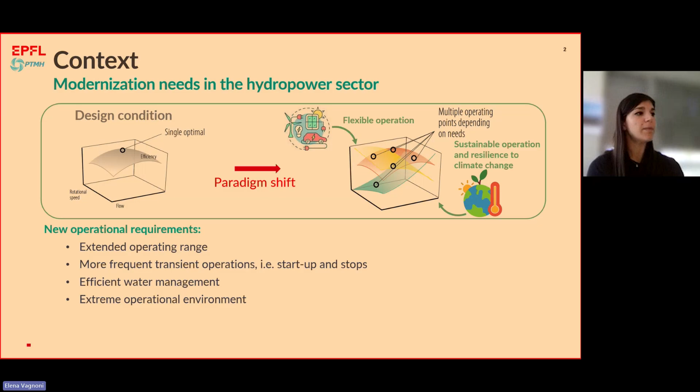These ask for new operational requirements, namely extended operating range, more frequent transient operations. So we hear more and more those high numbers of startups and stops per day, efficient water management, as well as, as I already said, extreme operational environments.

All those new requirements, of course, do not come without issues in terms of operation and maintenance of hydraulic machinery particularly. So we are experiencing premature aging as well as safe operation issues due to increased vibrations and fluctuations of pressure. That leads, of course, to increasing OPEX costs, failure, as well as slow response of machines, and also environmental concern.

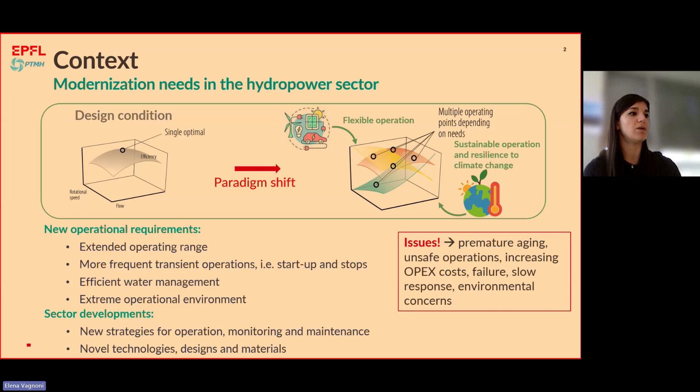With a focus on the premature aging and especially risk of premature failure of mechanical components, the sector is today developing new strategies for understanding how to better steer operation, potentially in an optimal way, how to develop new monitoring strategies, as well as whether we can move towards a predictive maintenance approach. And that, of course, also calls for novel technologies as well as design and materials.

When it comes to premature aging and failure, one of the main topics is what do we actually know about fatigue-induced damage in hydraulic machinery? So what's fatigue? Fatigue is the deterioration of material properties, structural properties due to damage because of fluctuating stresses.

In turbines, we often have such a condition because we often have off-design operation that leads to fluctuations coming from the hydraulic loading, and also transient operations such as startup and stop that, of course, impact and increase the unsteady loading, as in transient operation we have to pass through unsteady operation of machines and flow.

We have cracks in hydraulic runners. Even the best welding conditions and best manufacturing properties still leave micro cracks in the structure because of manufacturing, welding and material defects. And overall, we also have quite heavy hydraulic loading that is translated into structural loading. And this long-term operation under high loading, of course, also leads to micro crack formation. The issue is that those cracks propagate under cyclic and unsteady loading, and that can lead to failure.

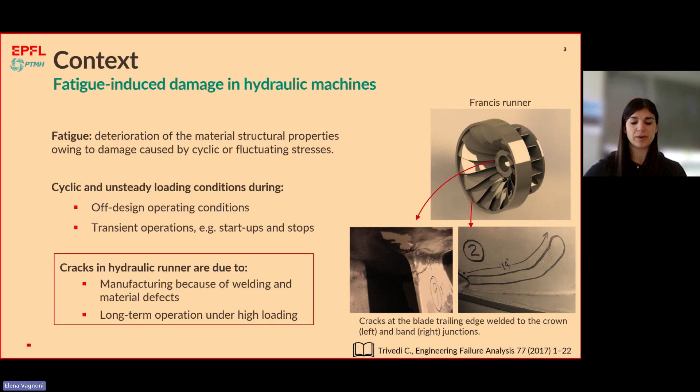What do we know about the forecast and modeling of fatigue? Do we know today how to properly forecast and track how cracks propagate? To answer this question, we mainly have to understand the dynamics and analysis that lead to such a forecast. In particular, how a crack propagates and how to forecast the deformation of a runner itself during operation. We need first to know, in terms of structural analysis, what are the loading conditions of the machine.

So what are the hydraulic loadings through the different operating conditions, not only steady state, but also during those transients that lead to stresses. And we want to know what are those maximum stresses, and are those compatible with the structural properties of the runner. But we also need to know the modal analysis response. So what are the modes and natural frequencies, which are also related to damping, added mass and mode shapes. So what is the fluid-structure interaction actually behind the deformation of the runner?

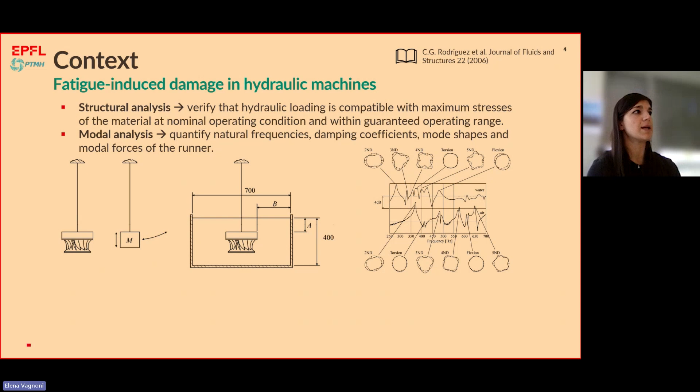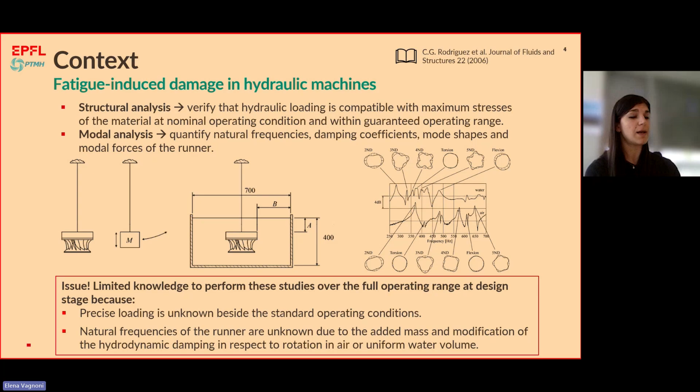There are some approaches today that lead to an analytical understanding of both the modal response as well as the structural loading of runners. But the issue is that this knowledge today is limited to selected studies, and there is a lack in understanding how both structural loading and natural response behave through the operating range, particularly during transient conditions. It is to fill these gaps that we are currently addressing quite an important research effort to try to understand those problematics and give a scientific answer to such research questions.

How do we do that? We leverage our experimental capabilities. So here you have one of our test rigs where we do reduced scale model testing that you can see here. Let me put the laser, it will be easier.

Here, that's the model test that we want to study, and in particular, as you will see later, we perform measurements directly on the runner during transient conditions to measure the stress and of course also the hydraulic properties of the flow. The flow comes from here. We have all the energy of the flow, which is given by the feeding pumps that allow us to drive the flow both in turbine and pumping mode.

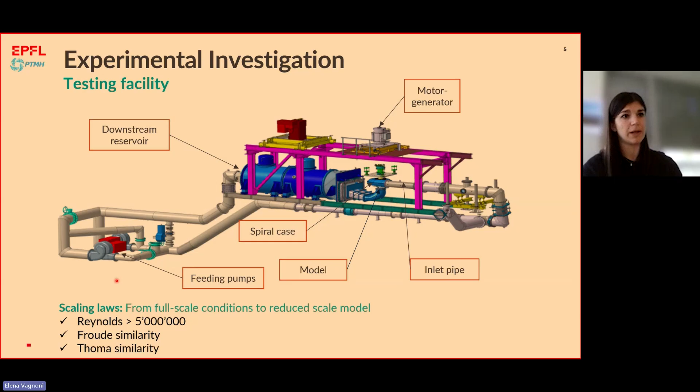We try to keep similarity laws as close as possible to IEC standards, also for transient conditions, so to respect Reynolds above 5 million, Froude similarity, as well as Thoma similarity when we assess the cavitation performance. This is our telemetry system and the equipment that we use to perform such a study.

The telemetry system allows us to do onboard measurements of strain through strain gauges on the blades. Here, for instance, you have an example of one of the equipment that we used, and also pressure measurements on the runner. The telemetry system is the same, and different sensors can be exploited. Of course, we still want to track what happens to the stationary part of the machine.

We have several sensors in the static part of the machine, at the guide vane surfaces, in the vaneless gap, and in the draft tube. It's not represented here, but we also have some in the upstream pipes to study any upstream wave that could affect the pressure fluctuations.

The selection of where we put the strain gauges is not only to measure the stress itself, but also to understand the stress gradient and the proportion between tensile and bending stresses. As we know, in pure crack propagation methods today only the tensile stress is accounted for, while with stress-life methods based on a Wöhler curve, typically both tensile and bending stresses are taken into account.

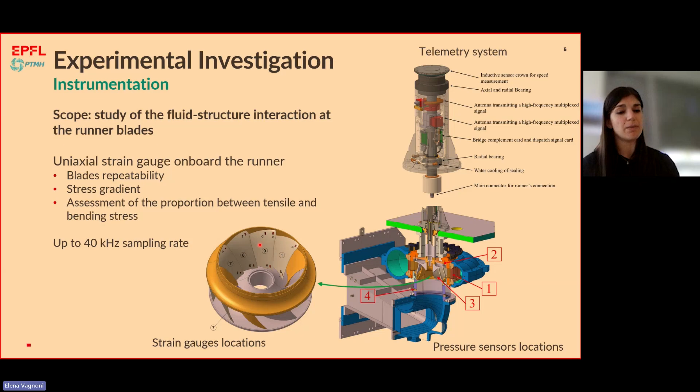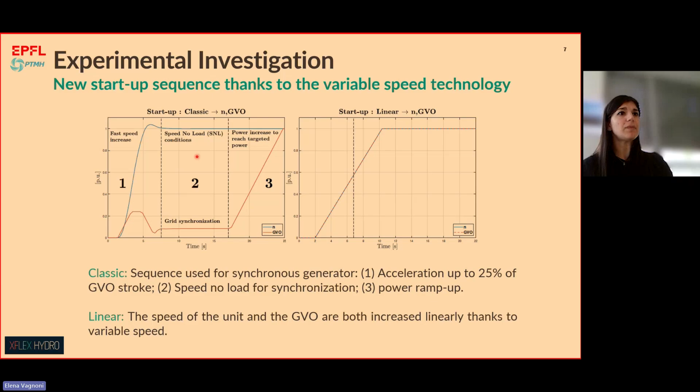We also tested what happens if we have a full-size frequency converter, so we are able to accelerate linearly without passing through speed no load. Some of you might have met Martin Seydoux while he was with me at EPFL a few years ago. This was one of the main results of his thesis studying the stresses and the damage.

One of the main conclusions was that if we are able to use a variable speed converter, we are able to decrease the fatigue, so to increase the lifetime of a machine, with up to 15 times fatigue-induced damage reduction in a single startup.

Here you have stress measurements over, in this case, 25 seconds equivalent in model scale. Of course, in the prototype that would be longer, or 8 seconds if we can use a fast full-size frequency converter. You might notice that here we have quite high amplitude stress fluctuations that we do not have in any other operation, even though the overall stress is lower for the linear startup.

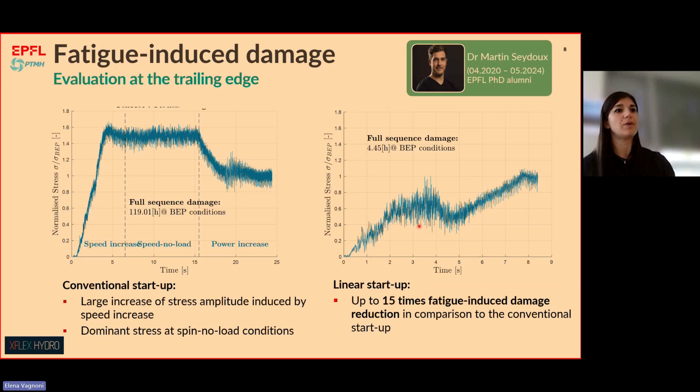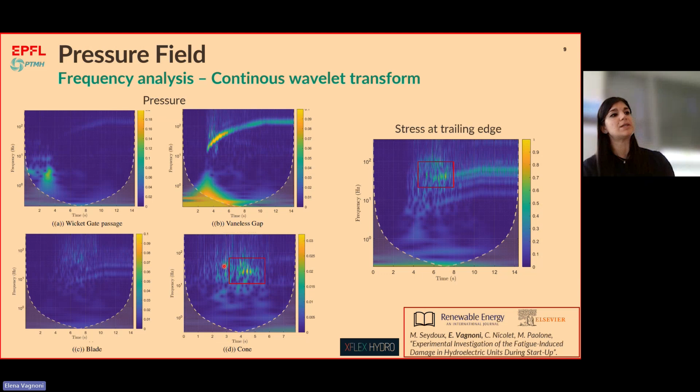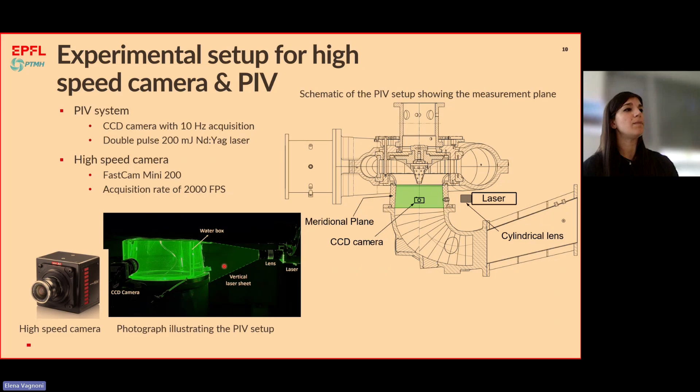We can also see that such stress amplitudes correlate with what happens in the cone, and we observed that this is linked to a vortex rope. So we wanted to know more. We performed both high-speed camera acquisition and particle image velocimetry with our equipment. And here I want to show you a video of what happens.

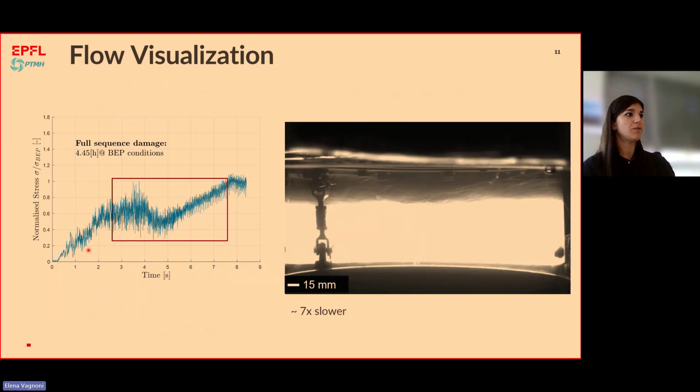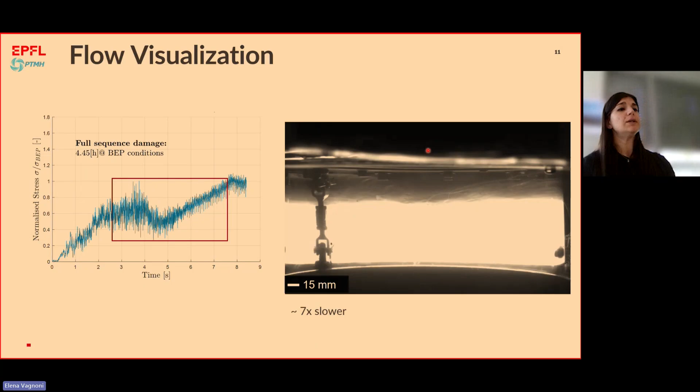What does the PIV say? With the PIV, we notice the beginning where we have no cavitation and the flow accelerates. Then we see the creation of these double vortices where only one vortex cavitates. Then we have double vortex cavitation, then a vortex collapse, a uniform flow, and then the axisymmetric vortex rope. So we notice that this fluctuation is related to when the double vortex cavitation happens, and when it collapses into a single vortex.

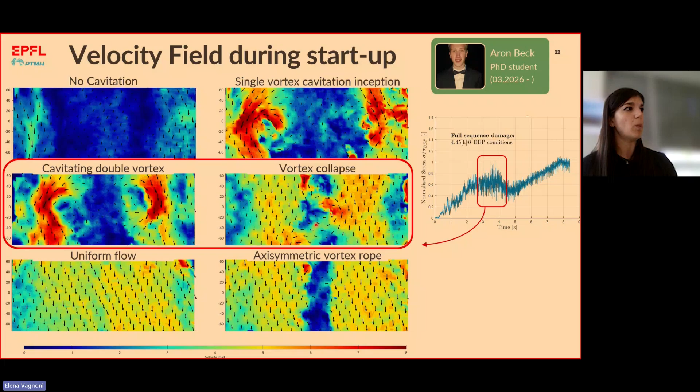We were quite limited with this PIV because it's not fully time resolved. In reality, this is a 10 Hertz classical PIV system. So we could not push forward with our measurements. So we thought, why don't we perform a CFD to see if we are able to capture such a dynamic?

So as a solver, we use coupled numerics. This is a software developed at the technical university in Lucerne. So it's a collaboration that we did with Ernesto Casartelli. Some of you know him from University of Lucerne. They developed such a software, and so in this collaboration we use it in order to predict the hydrodynamics of the flow during the startup.

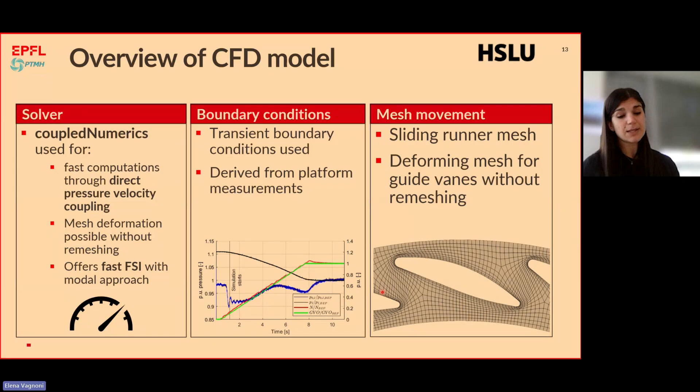It has the advantages of being a deformable mesh, so you don't need to have a remeshing during the transient, and offers also a fast fluid structure interaction approach. We used our measurement to impose the boundary condition, and we were able to simulate very close to almost zero. We went close to a 2 degrees opening of guide vanes without remeshing, which decreases significantly the computational cost.

As a turbulence model, we tried two. At first, the one that is known in literature to be best for speed no load and capture the anisotropy of Reynolds stress, which is this one. However, you can see here you have the PIV, here you have the results of a simulation with this turbulence model. However, you see here that the dynamics of the double vorticity is not well captured.

So we also used the other turbulence model, which is a little bit more heavy, however, that solves individually the Reynolds stress equations. And with this, you can see the result. We could perfectly capture the double cavitation vortex as well as the full breakdown of the vortex.

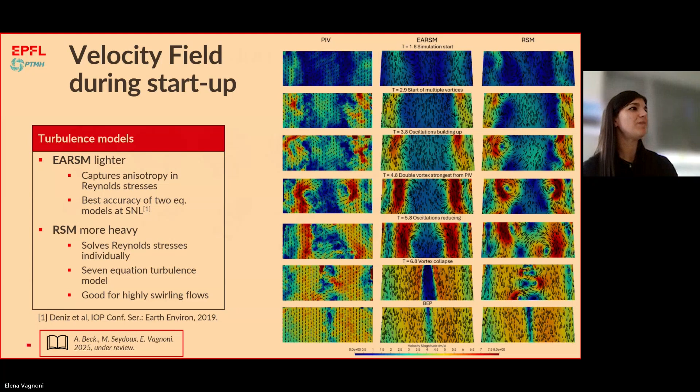Here you have more deeply the understanding of what is happening. So we have clearly the multiple vorticities that develop during the startup sequence, and they originate at the blades. So you can also see the development of the interblade vorticities, and of course this is still an ongoing study.

So the next step would be to fully correlate the dynamics of such interblade vorticities and the breakdown of a double vorticity into one single vortex rope with the dynamics of stress. But it already offers a very good understanding of what happens in the runner, where the vorticity forms, where the vortex collapses, and how that justifies an increase of stress fluctuations that leads to higher fatigue in the runner.

I also have a video, but I was not able to put it in the presentation, so maybe eventually I can show it to you later.

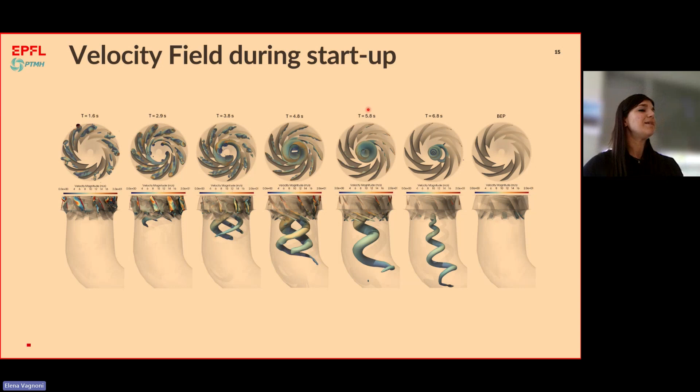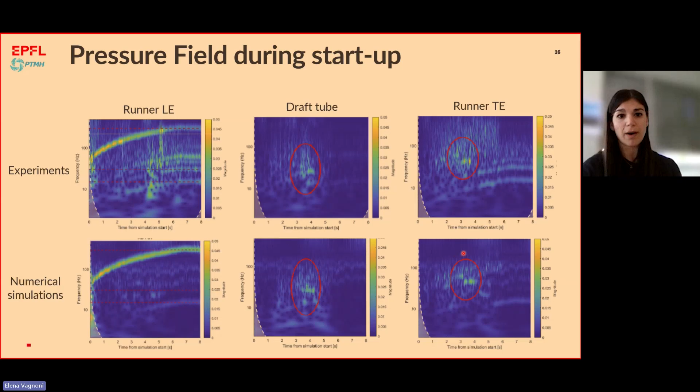So I want to quickly conclude with the validation of this. So it's not only a matter of comparing the velocity field. We verified that also in terms of pressure fluctuation. So in this case, we have a spectrogram of the pressure in numerical simulation and experiments at the leading edge, in the draft tube, and at the trailing edge, to be sure that we were capturing correctly the physics of the flow. And so we could validate it.

And so as a conclusion of the talk, I then have a slide on the outlook, as I said, those are ongoing fresh studies. So definitely flexibility is impacting the lifetime. With a study on how to steer differently transient operation, in particular startup, we can reduce the damage, but in order to understand how to optimally steer such transient operation, we need to understand what is the transient vortex dynamics and how that impacts stress amplitude.

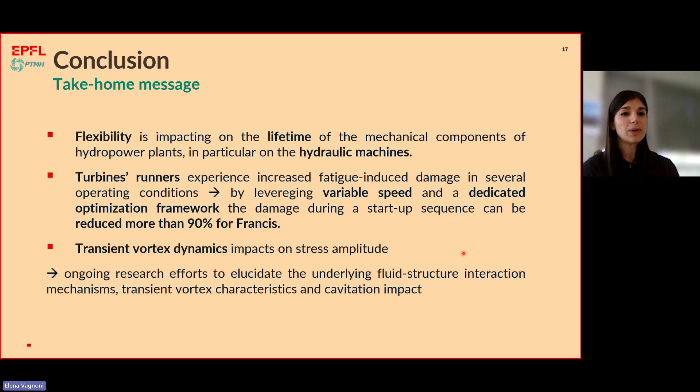So in this sense, we have ongoing research efforts to try to understand this underlying fluid dynamics, fluid structure interaction dynamics, as well as what is the impact of multiphase flow, as we saw that when it cavitates, the fluctuations of stress significantly increase in amplitude. So we currently have such a research effort with what I showed you, work that is published or under review, and we currently have further research effort on this.

So those are the 4 PhD students that tackle the problem from different angles. You have Sara, elucidating the transient vortex dynamics, building directly upon the results that I showed you right now. We have both Elie and Jonas, who are looking more at the fluid structure interaction and transient impact on added mass and hydrodynamic damping. Those are for startup mainly, but we are also interested to know how such dynamics is affected by transient operation when we change mode, so when we pass from turbine to pumping mode and vice versa in reversible pump turbines.

So for this, Nathan is currently investigating the flow phenomena and the fluid structure interaction during such mode transition. You can see here some first results. This is the spectrogram of the pressure fluctuation in the vaneless gap when we change mode from turbine to pump in 50 seconds. And in particular, we are interested to know, when we are in mode transition, either to turbine or to pump, what is the effect of the transient dynamics on rotor-stator interaction and rotating stall.

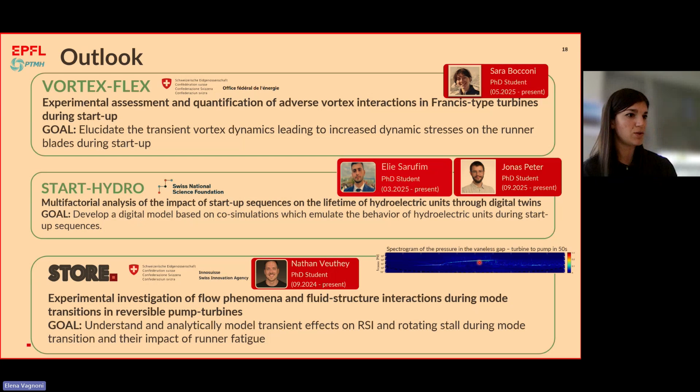Well, so that's it. I thank you very much for your attention. Here you have a few references of some work that is already published on those topics on fatigue during transient operation, and happy to take your questions.